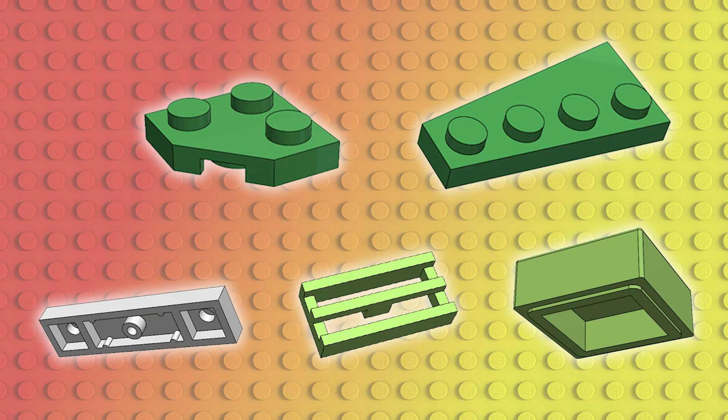This is a very quick way of modeling when you're making small changes to things that you've already modeled. As we're nearing the end of the assembly, we're also starting to tinker with certain elements of our assembly, cleaning up some mates and making sure everything fits together as it should. Let's get into it. All right, I'll be up to step 31.

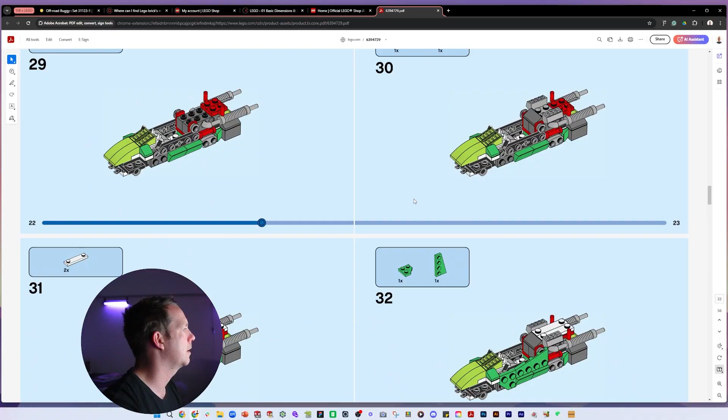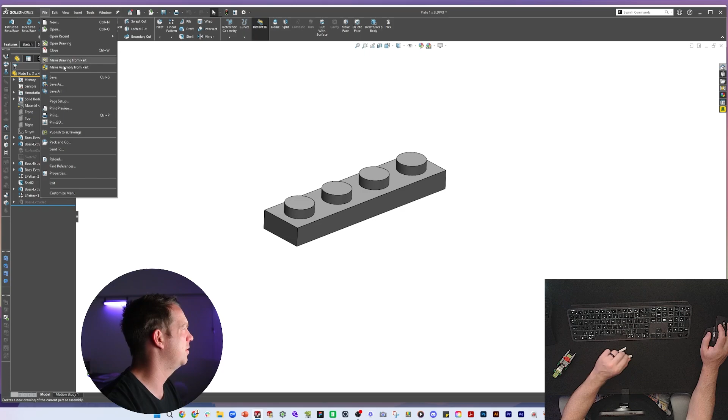Cool. Step 31 is a plate. It's 1x4. And if we look at detail, 2 of these parts are a little bit different on the bottom. This doesn't have a 3D view, so I will show you how they look. Obviously, we can start with this part. So let's copy that name and save copy of file. Plate modified 1x4 with 2 studs with groove.

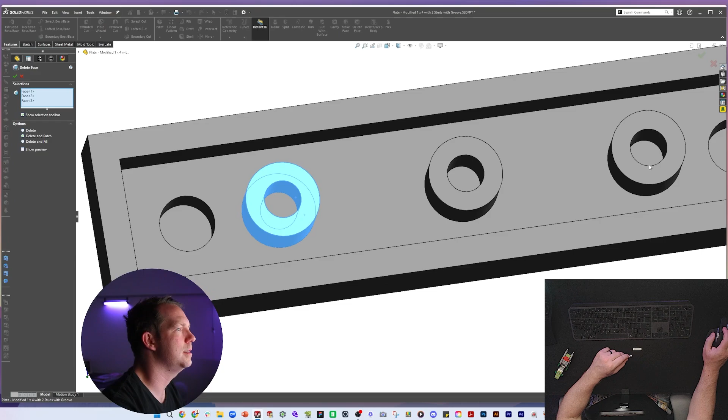Save, copy and open. And all we're going to do is jump before the shell and delete those 2 grooves, let the shell occur, and then on the bottom add in some ribs. Also for this point here, we're only going to have one. So again, we'll do a delete face, quick and easy way to remove these. Just keep what we need and let's put those ribs in.

So we have 2 ribs here, midpoint. We're going to mirror that straight to that side. Calipers, and the ribs themselves are 1.4, and then they are separated. Looks to be 19. It's probably got more to do with this area here, 5.2.

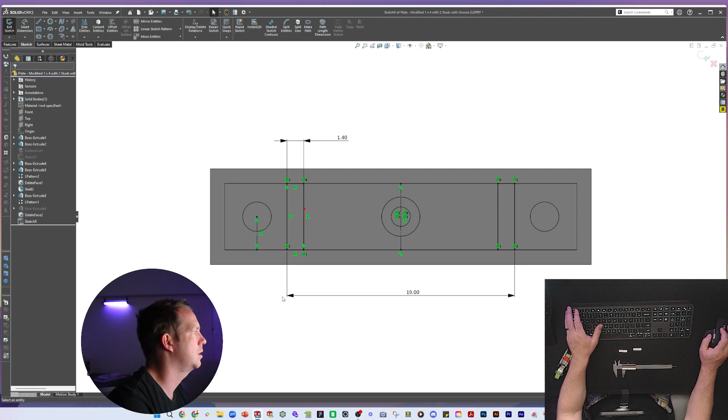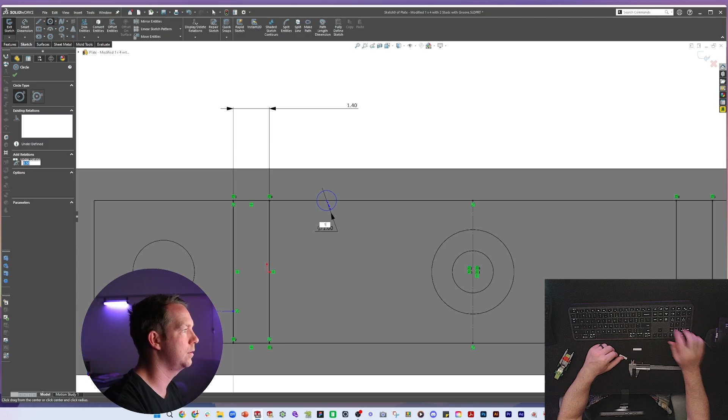If we did a construction line here, made that driven, got the midpoint of this line and put it here, I think that's actually the correct measurement, 18.6. So that looks fine. Then let's put some ribs in as well. The ribs are actually just sole points, 1 millimeter, 1.2 diameter, and they are about 17.2 apart. Easy. Extrude up to surface.

Okay. No doubt these will have some special descriptions. Let's have a look. Green wedge plate 4x2 right. Green wedge plate 2x2 cut corner. Okay, let's do the cut corner first. And this will be, I think, a variation of the standard one.

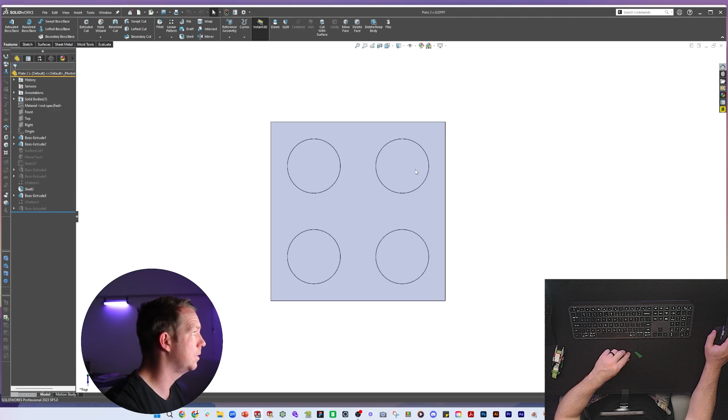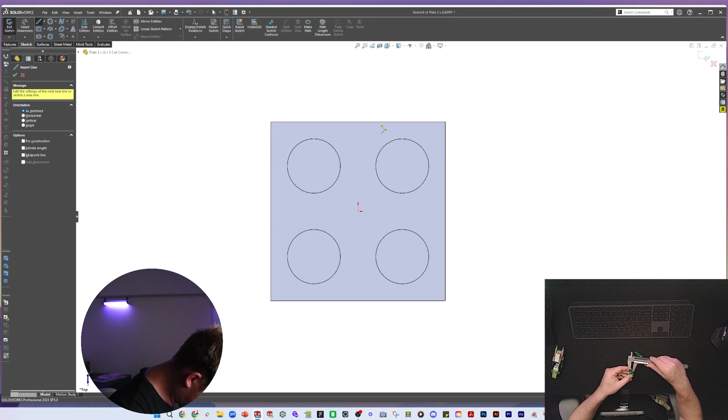So I find our plate 2x2, and we can add in here a configuration for 2x2 cut corner. We're going to do a derived configuration. Now that means that configuration only works under this one here. And what we'll do is, before the shell, we're going to cut that corner exactly as it says. Now, I don't have dimensions, but it does definitely look like a 45-degree cut, and it's very close to 8 millimeters. Let's assume it's perfectly in the middle, which would be 7.9.

So we are going to do a cut through. Just go through both directions, and then a delete face to remove top. Now, when it is shelled, we get a different result on the side. Boss stays in the same place, but what actually happens on the part itself, you can see here, there's a gap there where normally there'd be that circle. So we just need to add in that gap.

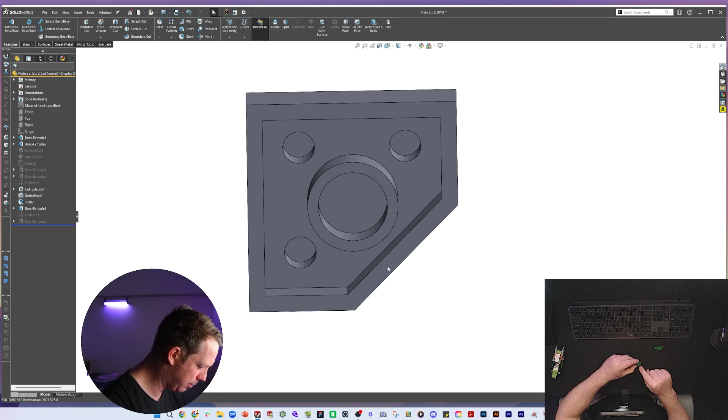And the distance between faces on that is 5 millimeters. Let's get our midpoint there. Put a rectangle either side. Dimension 5. Make this for construction. Make this cut extrude go up to this surface. Add it the same. All right.

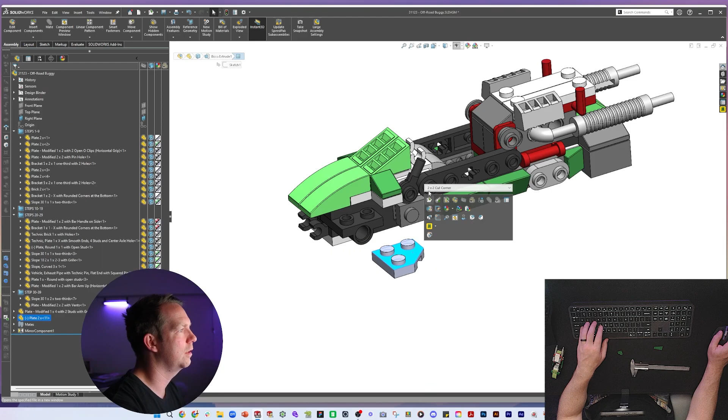Where the part is assembled, it's around here with the corner facing the front. So let's assemble that. Insert component. Now it inserts at the current configuration that's open in that file. That's why we didn't have to change anything. You can see it goes onto these parts here.

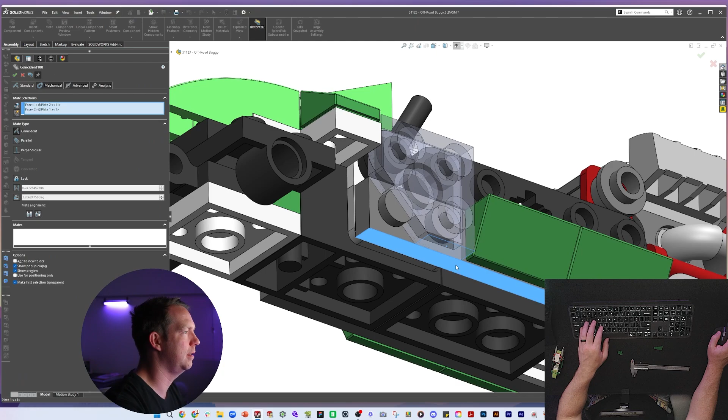So we will mate that face with this face, and I'll use my studs to mate, and I can see here that something is out of alignment. I won't add that one. We'll bring this down and we will have a look, see what's going on. I'll temporarily add a parallel mate, and what can we see? See how that gap works?

It's pretty good. Looks like the part on the bottom isn't aligned properly. So these points here, you see it's a bit off. Are these ones a bit off as well? Yes. Now that could be to do with parts behind it. So we've got some more troubleshooting to go.

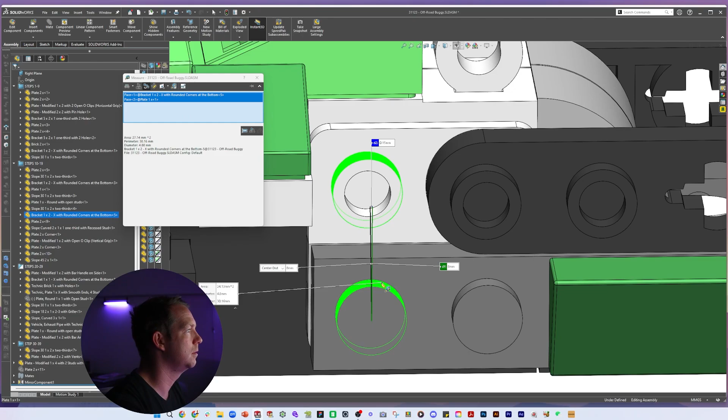So if I look at these two parts here, this one and this one, they're off. And if I hide this, look at this one and this one, they're also off. This one to this one is 8 millimeters center to center, and this one to this one is also 8 millimeters. But looking at this one, I can see it's clearly not aligned on the end.

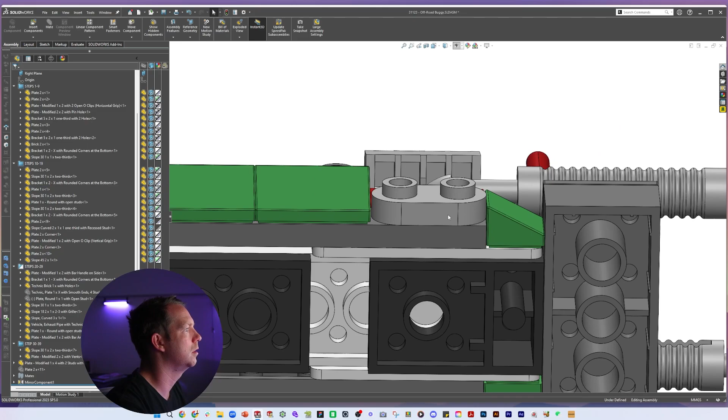I think it's because there's a coincident mate down here. No, or maybe it's this one. No, let's see all the mates associated with this part. To do that, go here and we go view mates.

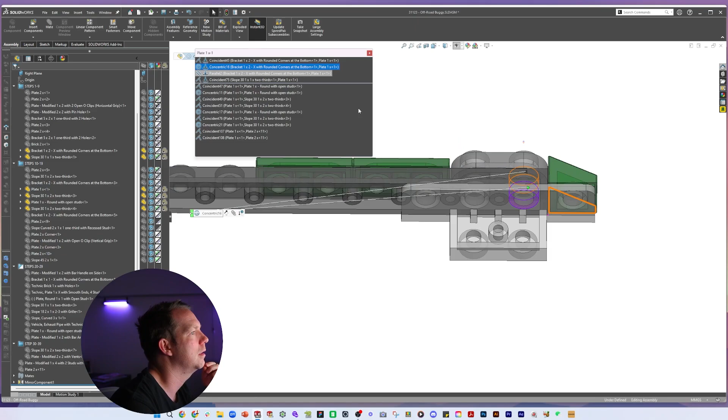When we do that, it isolates just those components and it shows you above the line the key mates related to that part, and below the line are other mates, usually later. So what we're looking for here is trying to understand what's driving its position. And now I think it's that concentric. If we suppress that concentric, we'll be able to change its position.

Now it's 8 pieces long, which means it should be 63.8. Dimension looks correct, no arguments there. Now remember, somewhere the tolerances are a bit messed up. It's nothing to do with those parts. It's all to do with this one, the one below it.

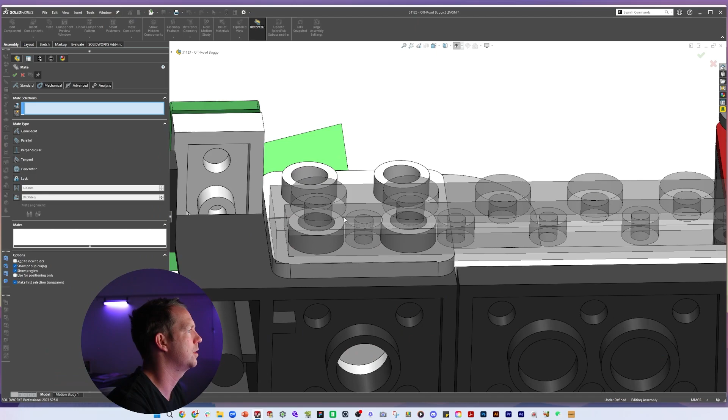So this and this should be mated. And what I'm expecting we'll find is that there's a gap or a step or something that's just out of touch a little bit, probably 0.2 millimeter. Well, you can kind of see that when you get to this point here, between these two there is a gap of 0.15. Now, what is driving that?

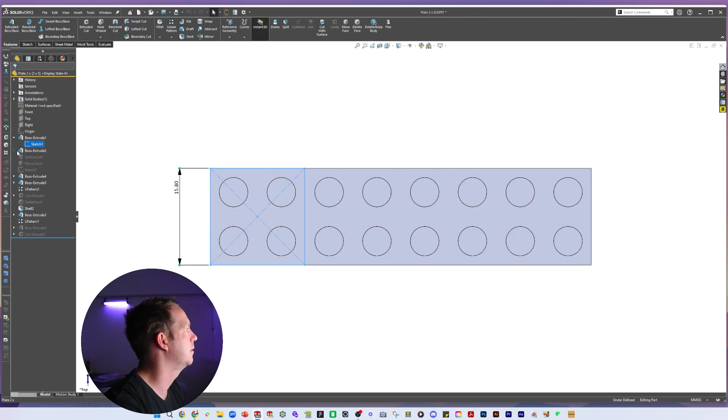Well, this part here has a bit to do with it. So how are the details going in this part here? They're all looking correct, no issues there. Link to that all looks fine. How about the rest of these parts, what they're built up on?

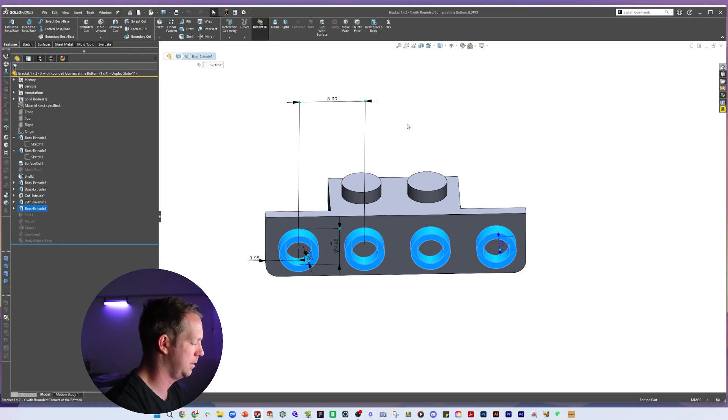This part is definitely questionable, let's have a look through this. 15.8, 8 centers, cut, move face, shell 31.6, 8 mil centers. I'm not sure if that's correct. Let's check: 3.95, 8.65. Okay, that's clearly wrong. I think this one should actually be 31.8. This could be 3.95, and that should be the same due to that one.

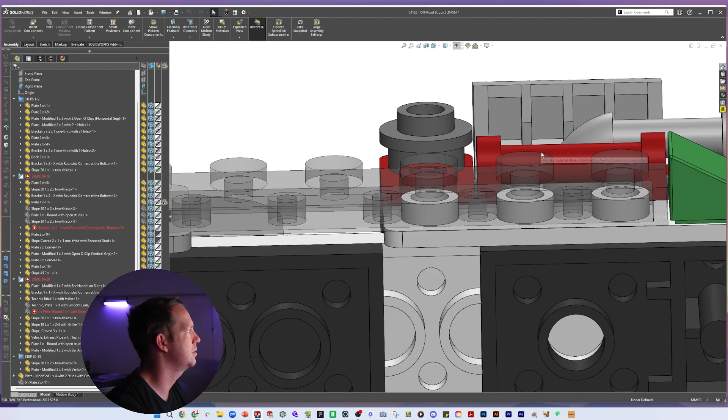Midpoint of this should look here. We get that touching, that looks better. Okay, so now we've got that central. Let's see what that does in our assembly. It's causing some problems. However, now look at this one, which is fully defined. I think we'll see now that this one aligns, 0.2.

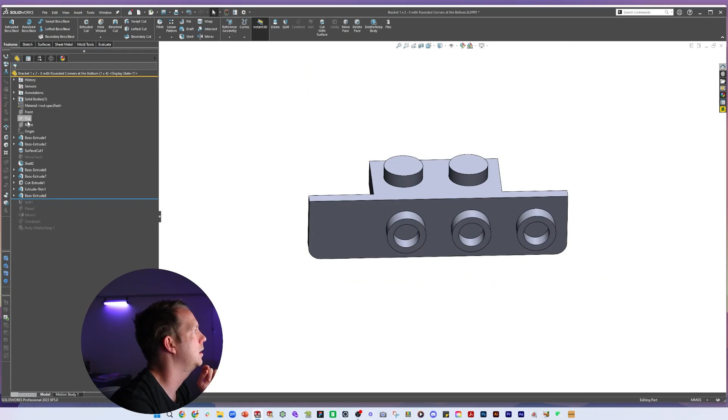We're troubleshooting, more troubleshooting - roll back and find the errors in these. 1x2 inverters, where's your second dot? Could be trouble, I have a feeling that we've stuffed up some configurations. Yeah, let's try and sort that with simple mirror. Okay, that is better. Have we resolved our mate issues? I think the answer was no, not quite. Or maybe yes, that looks better.

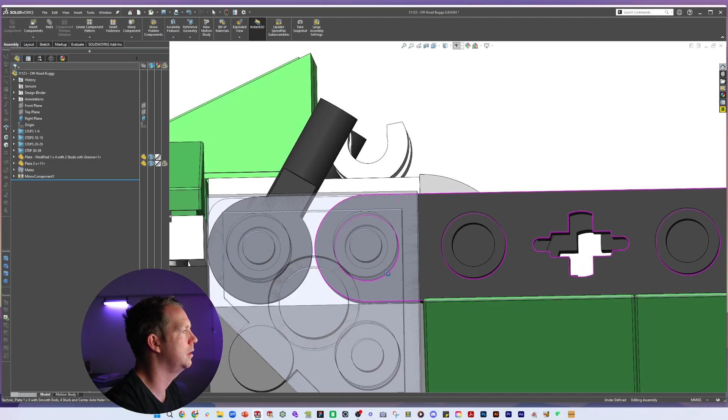Let's unsuppress, unhide some parts and see if they are starting to fit now. Okay, it looks better. Put our plate in once again, and it's fully defined and does look like it now aligns. Fantastic. Okay, so the second part to go in here is the longer one.

This is a wedge plate 4x2 right. Now this one's a bit different to all plates. It does have the 4 in a row lines, but I don't think we want to make a configuration from this one. We can, of course, start with that part and make things easier. So we'll do that - we open up this configuration and we're going to call it wedge plate 4x2 right. Save it as a copy.

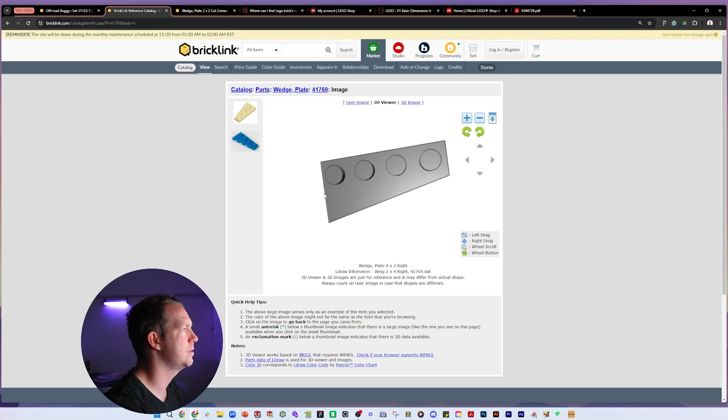So what we will change on this is we can cut away one side and remove those studs, and that's also impacting the shell, as you can see here. Let's get our top view. Let's roll before the shell. We will actually change these two for construction - they get left off, too much mucking around.

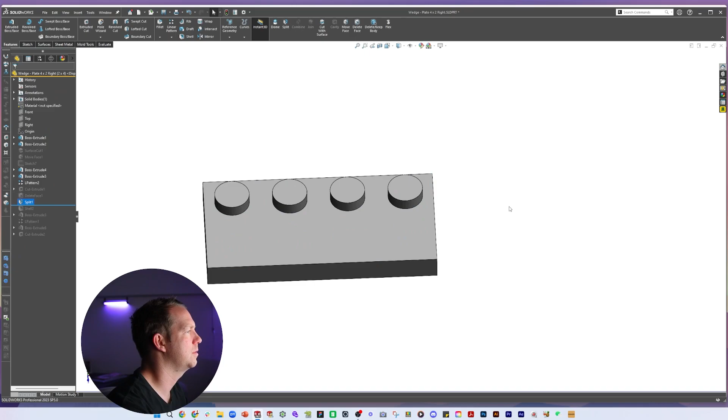Let's go back. Reload - reloading the part takes you back to where you last saved it, because in this case it's going to be much easier for us to do this with a new feature and start from here. All right, now how far is the split? You can see at one end, part size keeps its original size, length or width, 15.8. The skinny end, there's 2 halfway. So what we'll do is, for a shape, cut it like this and just cut all the way through.

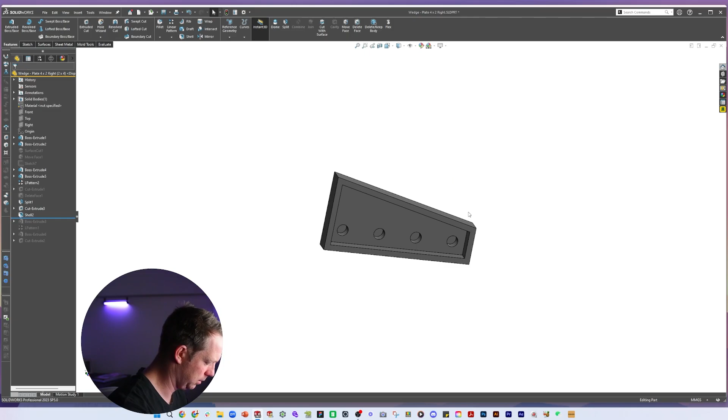Now we can do our shell. We can see the details looking just like your line. Only in this one, there's now some gaps.

We can see, 1, 2, 3. So we're going to put those gaps in as our next step. I'm going to convert some edges and sketch the line in between. Now these lines are perpendicular to the outer line itself. We're sketching them all in place.

So 1, 2, and then 1 more cut. Okay, now I'm going to trim them. All it is, I'm going to trim the sections that I'm going to cut out. Right, so I've got these 3, and then I'm going to add some dimensions.

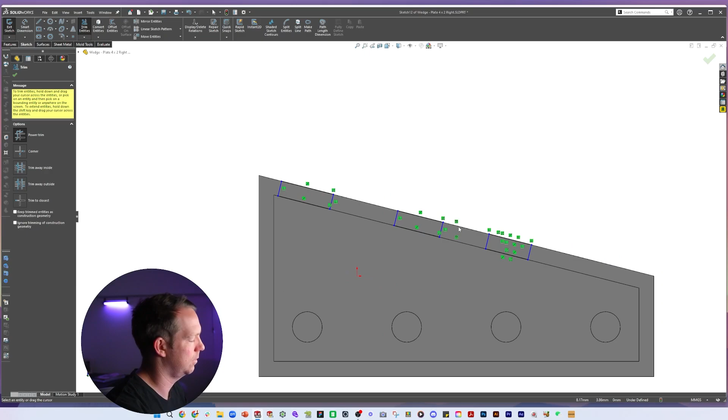Dimensions are going to go from this end point to here, so I get the outside dimension, and then I'm measuring, and I'm getting the inside dimension. Outside dimension 3, inside dimension is the gap once again, 5. And then the last one, another 3, another gap. Make sure my dimension comes off at the same angle, 4.2.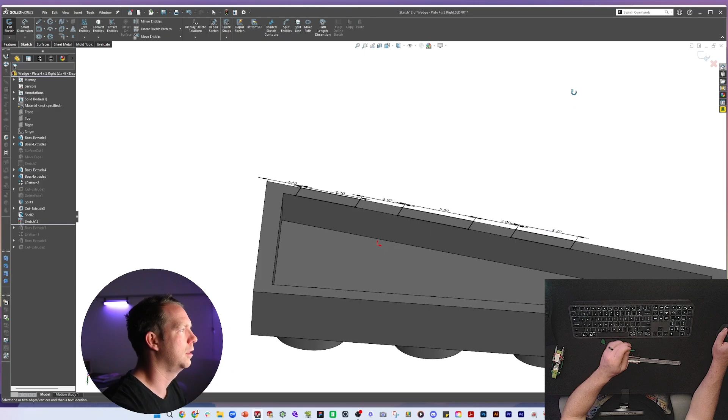Okay, now we can cut up to this surface. Excellent. Now, let's see what other details are kept. So we have this extrude, correct, with a pattern.

What we can do is a couple of things. Let's use our delete face tool to remove that little face there. And for the section that's going outside, we can try the same thing, although it might not work. Probably will. We can select 3 faces. There we go, and that is done.

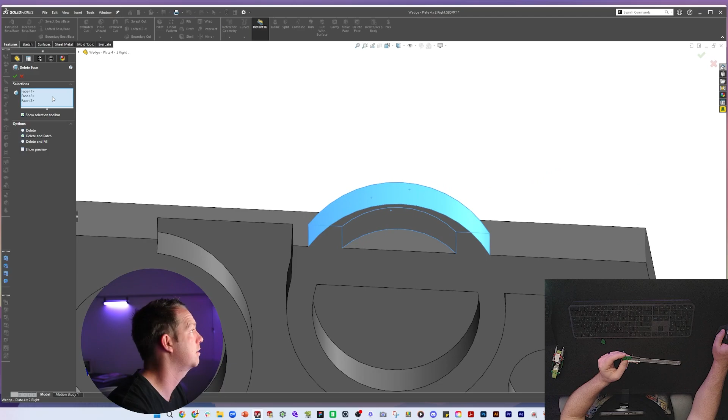Now that is a plate 4x2, right. There is a mirror part required, but I think we can use our mirror component to create that.

So in the assembly, this one goes above, pointing up. Let's bring it in, and our mates, mate the studs, and our colors. These are dark green parts.

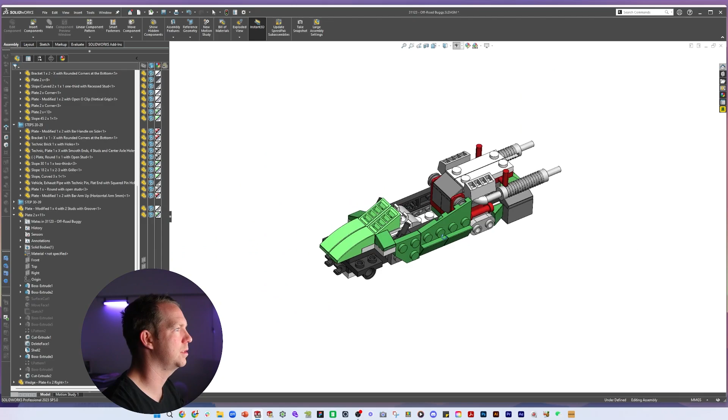Now the assembly instructions only add 1 part on each here, so this step, just adding on 1. And it's the next step. And we don't get to the duplicate till step 34.

But we may as well mirror that now and see if that works. Our mirror component, select these 2. Go to a preview and see, no, neither of them look correct.

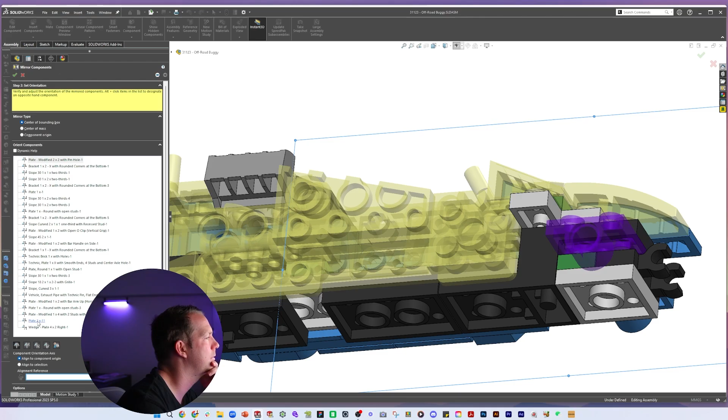So I'm going to have to do some work. So this one here, that is going to be none of those options. So we might do that one manually. We'll take it out, do it manually.

Whereas the next one, the plate, none of these options here work. But this is an example. Let's do what's called a create opposite hand version mirror, and we're just going to press the tick. I can see it's done for us here.

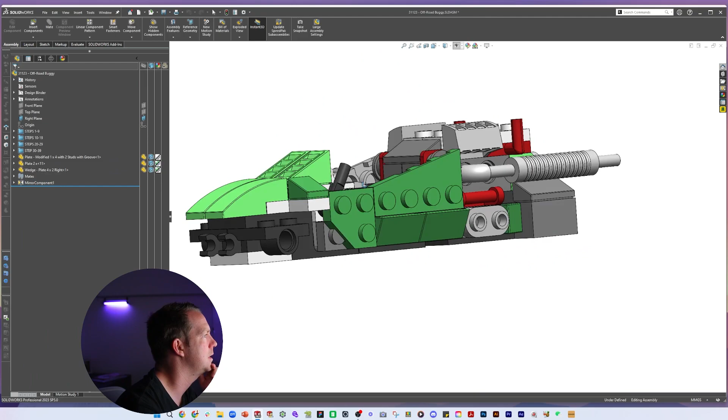And that is its own part file called a mirror wedge. Now, this is not necessarily the way we want to do it. There's one option for you. It's a separate part with this part brought in and mirrored, except you don't get to see the mirrored feature.

If we go edit this mirror feature component, skip to the 3rd step, we can see here how it actually creates the opposite hand versions. And in this case, it's created a new file.

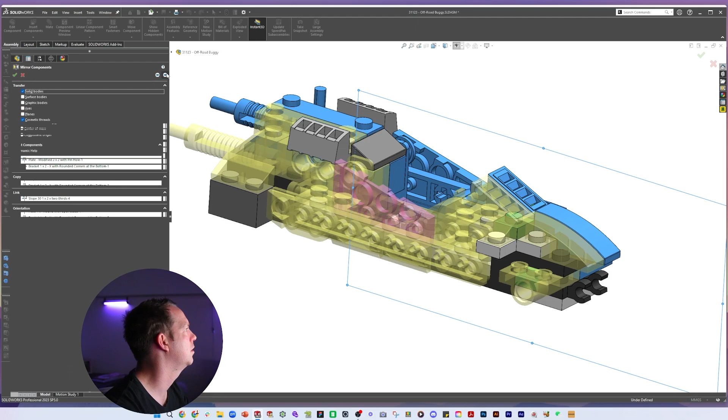But what we can do is go back a step, change that, change it again, go forward a step, just checking the other options, make sure you aren't missing it. Now, okay, press OK on these ones.

All right, if we take it out, then we'll have the ability to create a configuration on the inside. So let's do this again. We're going to edit mirror component.

We're going to include this part. We're going to go forward. We're going to make an opposite hand version. Forward. Okay, I'm very surprised it's actually not giving me the option.

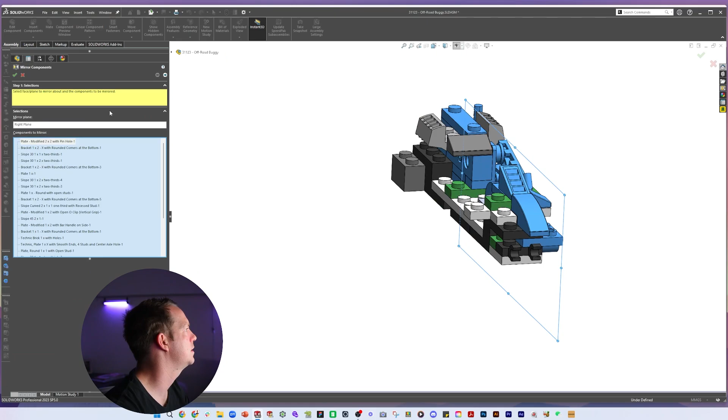I want to make it a create new derived configuration in the existing files. We'll have to come back and do that later. For now, we will leave it because the part looks correct.

And this wedge part, not this one, not this one, don't want that, this one here, made this like the other ones. Flip and then use our concentric mates to line it up. Give it bright color. Move all these parts into step 30 to 39.

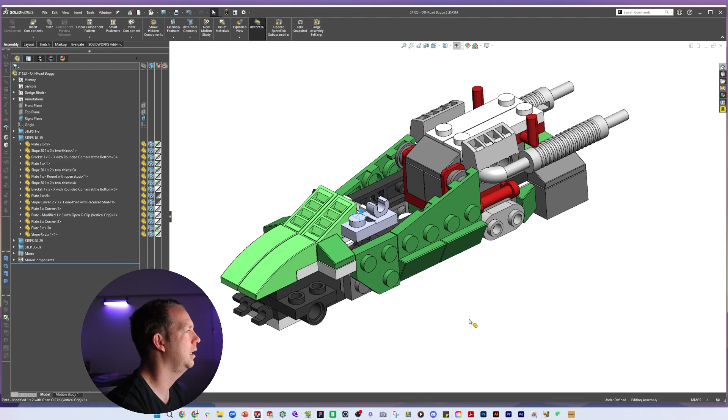I'm going to do that by clicking while holding Control and then using the mate tool to get into position. It's going to be facing this direction. So 1, we have this Grille component, which is a new part, line tile, modified 1x2 Grille bottom groove.

Let's grab out some parts. This one, then pull across on the other side in that. And this one, then we have, assume we're going to use 2 of those grilles. The other 2, and a small green flat one.

Okay, let's put these green ones on. And then that white one, it's going there. Is that right? Yes. The grille part, let's make one of those.

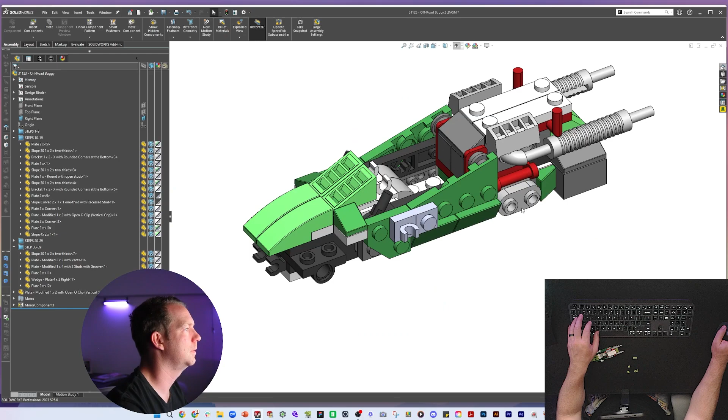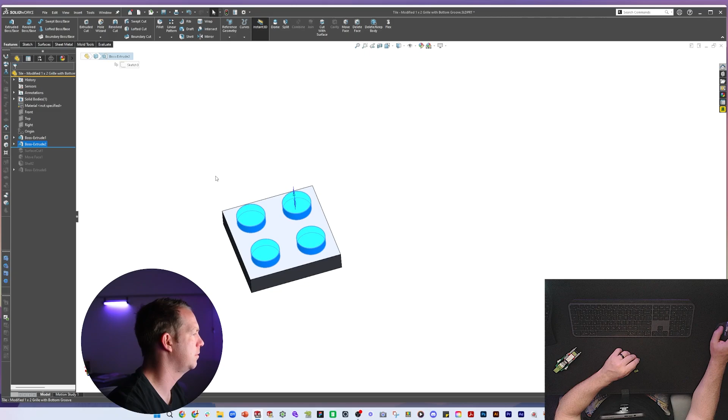Let's use a plate that's 1x2 as the size. I think it's going to be the same size. This is our starting point, but make a completely new part. We will delete all the configurations, we're not going to need them, and we will make a default configuration. Delete the original, delete everything we don't need, just to simplify, and then let's roll back. So we don't need these. I think that sketch, and in fact this shape we can change to say these dimensions.

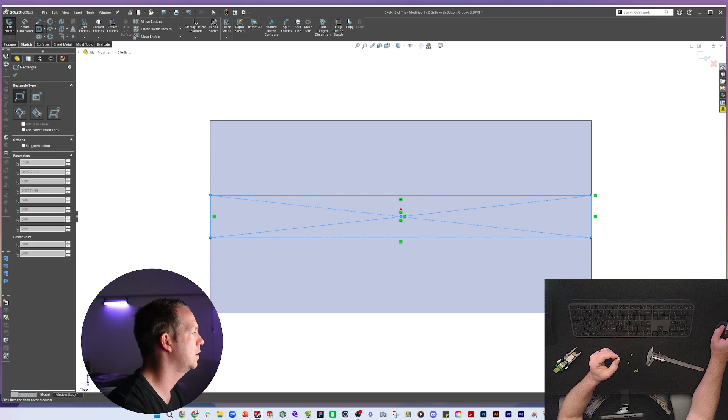So no surface cut required, no moving face required, but we do need a shell. So we do the shell, we don't need this, and now it's time to cut our grooves. We'll do this from the top, and we can just measure the thickness parts that remain, 1.2, of which we have 1 on that side, 1 on this side, come to 1 on the other. They're all going to be equal at all 1.2. And then what we're cutting down to is 2 millimeters for the bottom. So we're going to do a cut offset from this surface, 2 millimeters, but we're flipping the side, and that'll give us our little grooves.

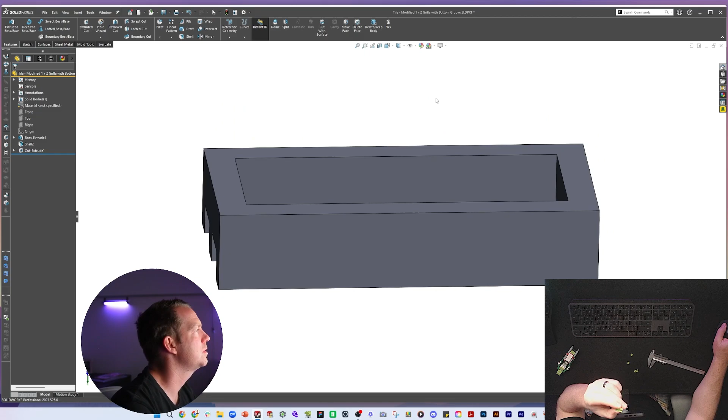Now, if I flip over to the bottom, there is a very small ledge that we've seen on quite a few parts. So we do this with an extrude thin. Can't remember what dimension we've been using. This will do for now, 0.2, and it's usually got a 0.5 mil radius on those corners. And then this part also has a little pin point right in the middle. It's 3 millimeters, and as far as I can tell, it comes right up to the top.

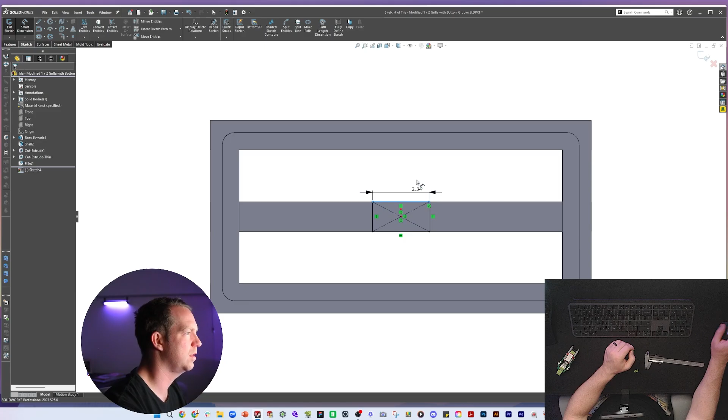Okay, simple little part. So that, and let's bring it into the assembly. That is in the middle. Let's use some outside faces to mate it. And then let's assume there's a gap — it's going to be 0.2 or 0.4. 0.2. Nice. Okay, so we've got 2 of those.

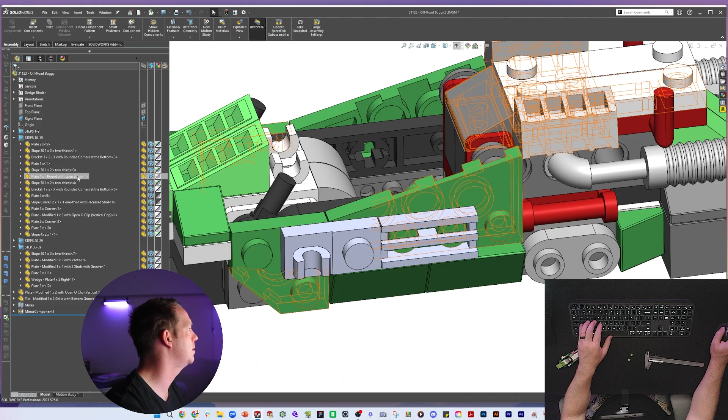And then the last one is a square, and they have called this part a line tile 1x1. What do we have that's 1 by 1? We don't have just that one tile there, so let's just make a part. This is called line tile 1x1. Once again, we will get rid of everything we don't need, create the default configuration, and then get rid of features we don't need.

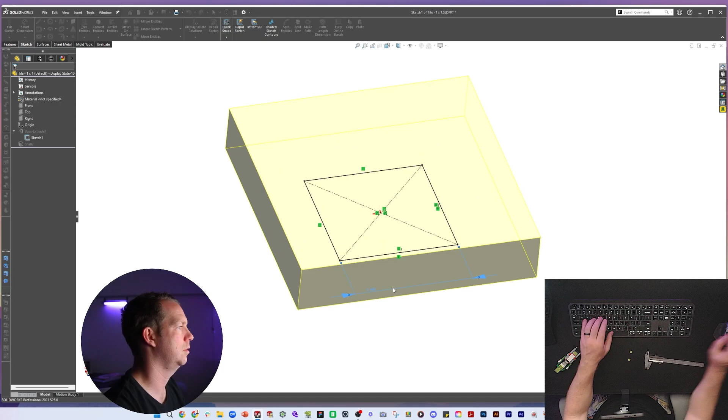There's very little to this part. Can we need any of that? All of that? What I need is this. Go to the normal dimension, 7.8. Its height's going to match everything else. 3.2. And then it's got the usual detail on the bottom — it's got the shell and then it's got that edge that we just did before. So, thin feature going down 0.2 of a millimeter with some fillets on the outside. And that's it, the simplest part we'll probably get to.

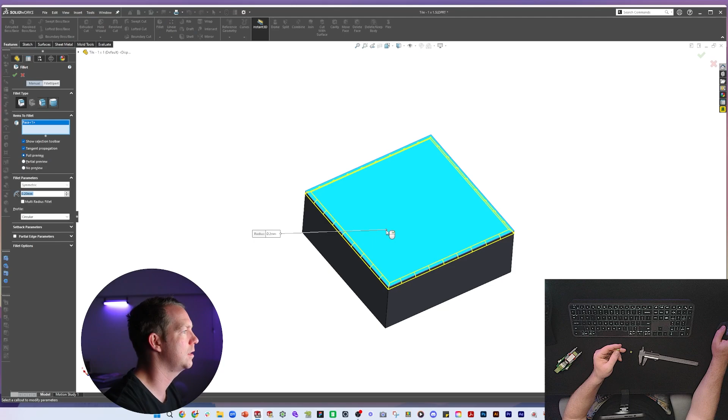Let's put some very tiny fillets on the outside. They did a tile slightly different to everything else. And move it to the assembly. Use that 0.2 dimension gap, lined up nicely. That is done. All right, let's update some colors — this one, lime green, this one also lime green, this one, white. And let's mirror those components. Very good. Nice. Back, and saved.

We're up to step number 36, which is a simple part. Let's go — on the bottom, plate. So let's add a copy of a plate, change that configuration to 2x4. Let's get the orientation correct. Yep, it's going to go here. Add some mates, coincident mate, good.

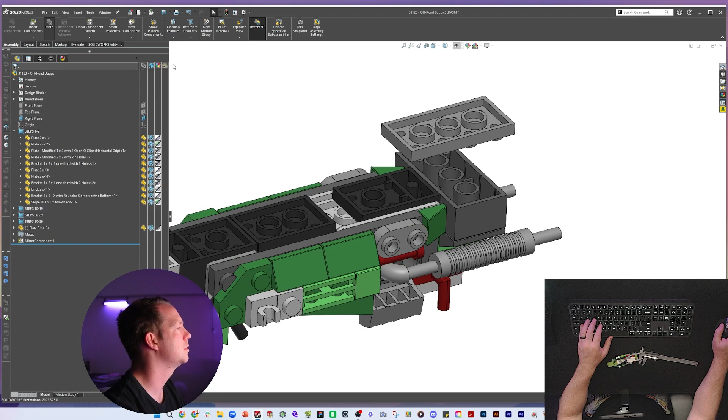We're going to add a mate at the edge. Yes, and then it should be in the middle — front plane and right plane. Nicely done. That part is white. Let's see if there's any more quick parts. No, yes, we have — we have done that one.

Okay, let's get 2 of those. So that gives that part there. Grab one on this side. Actually, let's add to this one — that one will be a mirror. So done, so we have one of those parts there already.

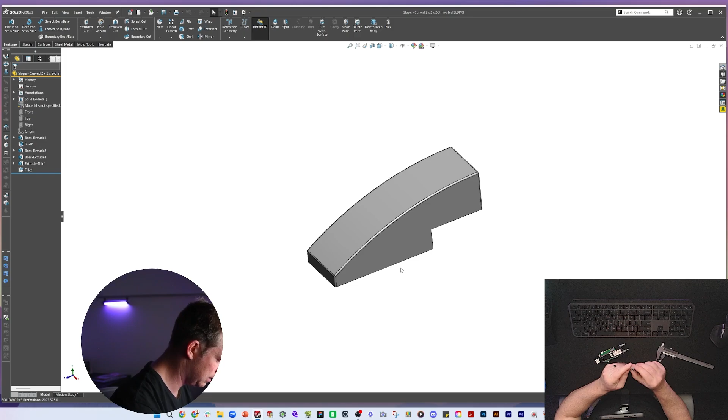And then this step, that is a new part. That part is grey slope curved inverted. Let's not forget our steps — okay, slope curved 2x2 by 2/3 inverted. Let's reference this one, I have some similar shape to it. We'll save a copy and let's go. But so if we're looking at the part, we should actually flip it, and that's probably the one thing that I should do here. Now, how do you flip something like this? Well, there's no easy way to do it.

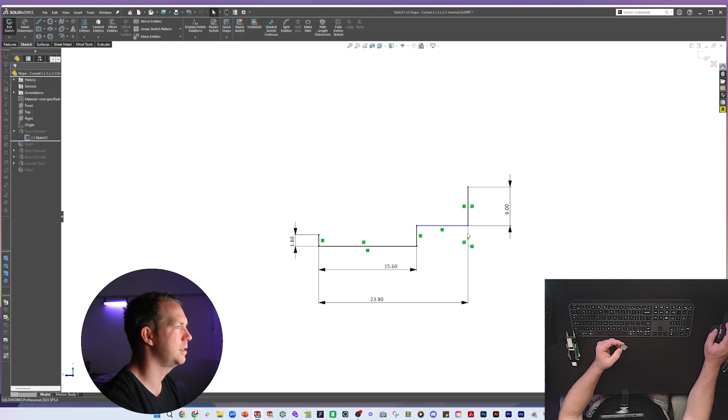Let's just reference the dimensions we've got. And then they're probably going to change. They might stay the same. To the curve that's going to change. So if we delete that and then we're going to move some of these bits around. Sure, that one might not be there. We're going to reverse the dimension like this. Bring that up. Bring that one up. Flip this one. And then we can add our curve back. Just like that. We need to check our dimensions.

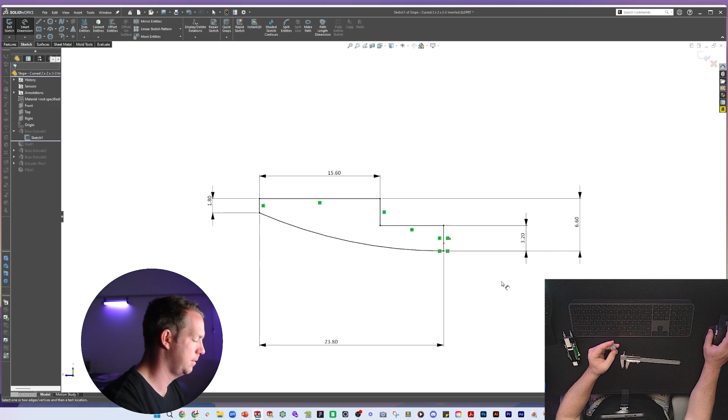So now lower section 3.2 and our total height 6.6. Now our width is not nearly as long. That top section is 7.8. I think the whole bottom section, the whole thing will be our normal 15.8. There we go. Now this is too wide. So we're going to decrease the width to 15.8. And then the part is shelled from a different face. This top face. Now it has done it for us, so it's good.

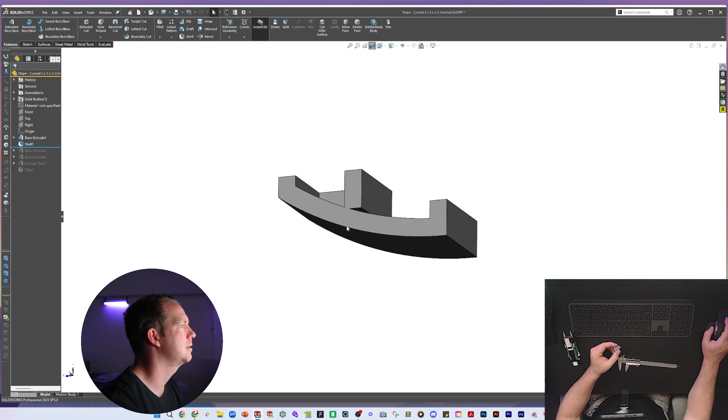As usual, we need to just fill in that section there. Okay, where that gets cut through. Let's just delete that face so it's solid all the way. Now we can put our bumps on top, our studs. Here we go. So I'm going to do a sketch on this face. These are going to be the usual 4.8 on the outside.

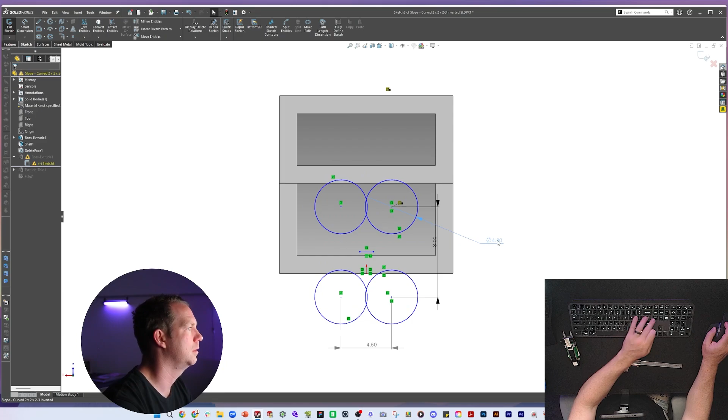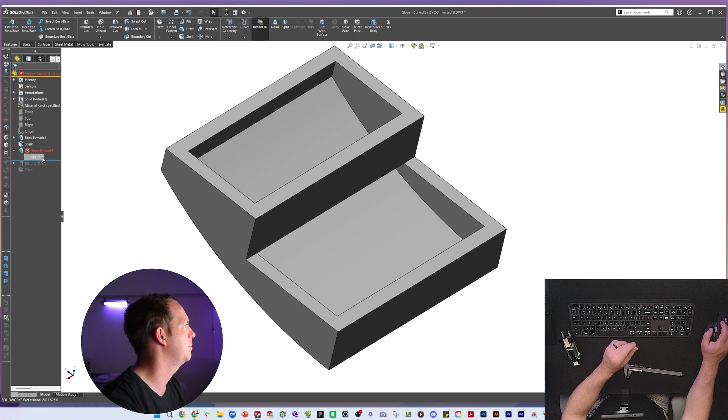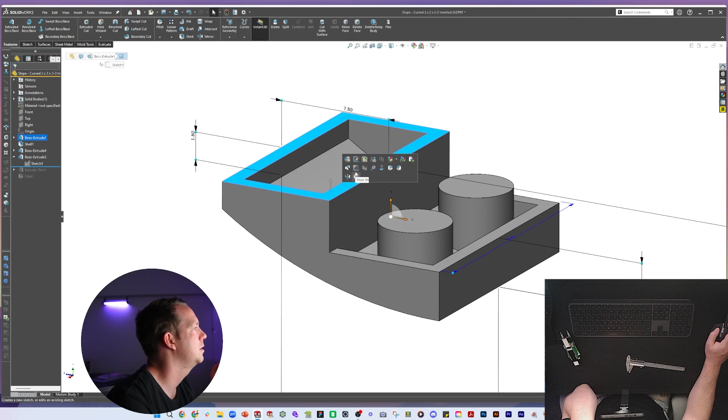And then each of these will come up normal height. But for the first one, we're going to select contours, and we're just going to select these bottom 2. And we're going to make a key. We're going to offset by 1.6. We go up to the surface. And then we'll do the same thing on this face. Same thing on this face. We select the contours, but we will go offset from surface to get our height. We can merge that. Then we can just delete face these bits sticking through.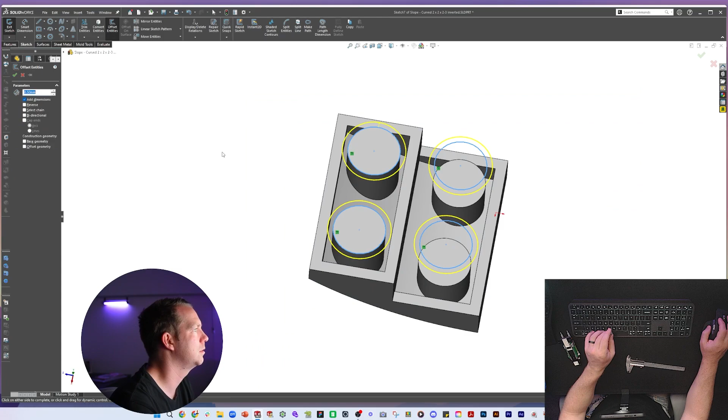And then to get our holes, what we're going to do is convert all of these and do our normal offset, 0.8, and then do an extruded cut that goes up to this surface here. There we go. You don't need these details or the fillet on the outside. It's probably there. We'll leave that for now. All right, slope curve is done.

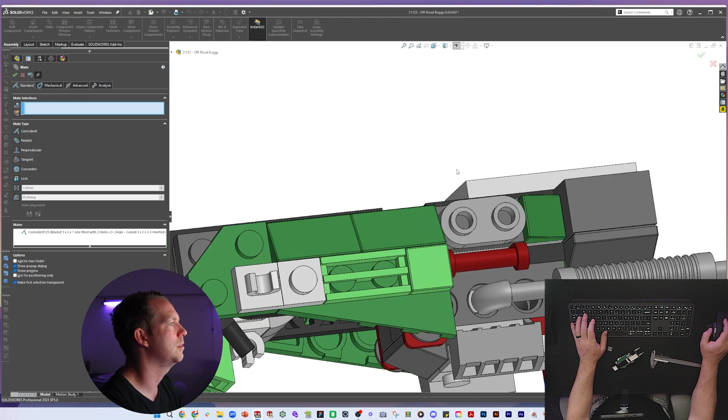Let's insert that into our assembly. It's on the bottom. It is this location, so it's touching the edge of the white. And let's see if we get our dimensions correct. We might have to make some adjustments. That would be essential to that. And that actually looks pretty good. Very nice. All right, and let's add this part into mirror components. And let's give a gray color to this part here. Correct, actually. And keep going because there's another 4 piece that's just added on the rear.

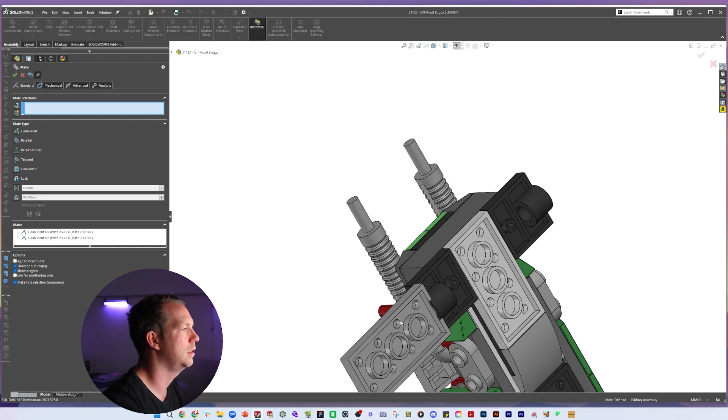So very easily put our mates in for that one. Duplicate that part. Use this face. Then I can use these studs to get it aligned. And now we're starting to get into a bit of a rhythm with our mates, knowing what the parts are actually lining up with. All right, that is step 38. We're nearly 40, but we are definitely over halfway. I'm very curious to see how this looks in KeyShot. We haven't tried yet. So we're going to give that a whirl, just as a little preview for later.

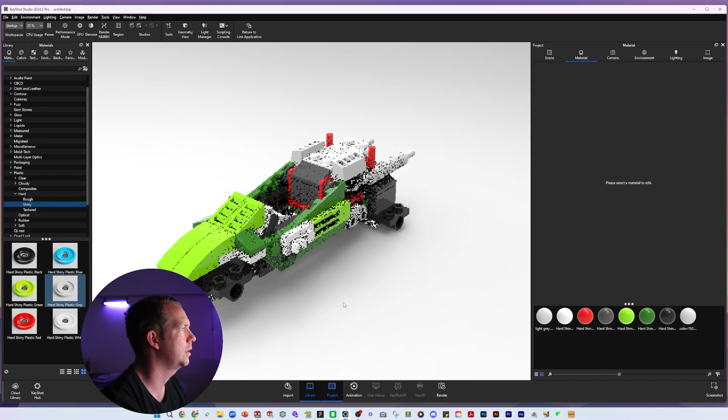Right then, there we go. Bad. Of course, materials are not in there. But I suspect we can get to that very quickly. Gosh, this is going to be fun. When we get there, at least it's going to look very cool. Very realistic. Just need a couple more colors to join in. All right, little preview. Come back to this another time.